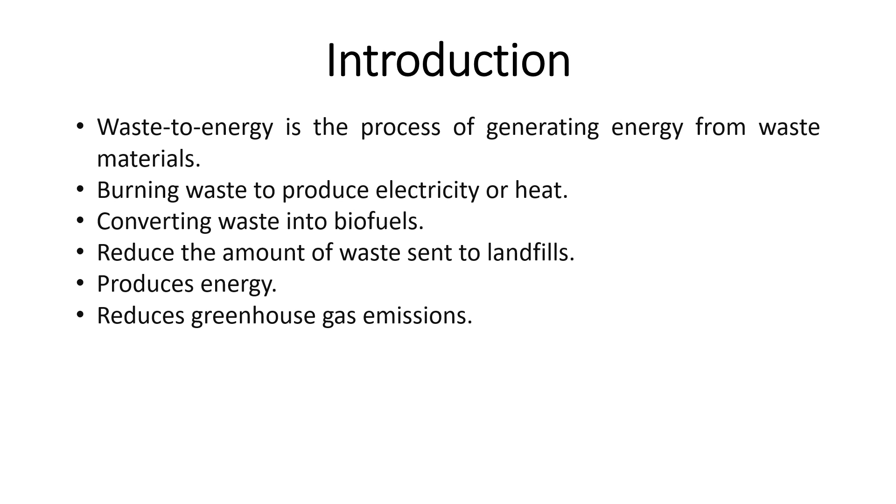So here we go for the introduction. Waste to energy is the process of generating energy from waste materials: burning waste to produce electricity or heat, converting waste into biofuels, reducing the amount of waste sent to landfills, producing energy, and reducing greenhouse gas emissions.

Need for waste to energy methods. Every year, the world generates more than 2.01 billion tons of trash. About a third of the world's waste is being openly dumped or burned. By the year 2050, the amount of rubbish generated annually is expected to increase to 3.4 billion tons. As the rubbish piles up, no number of landfills and recycling programs can keep pace with this growing problem. In order to tackle these problems, we need to have a sustainable and economical method to convert waste to energy.

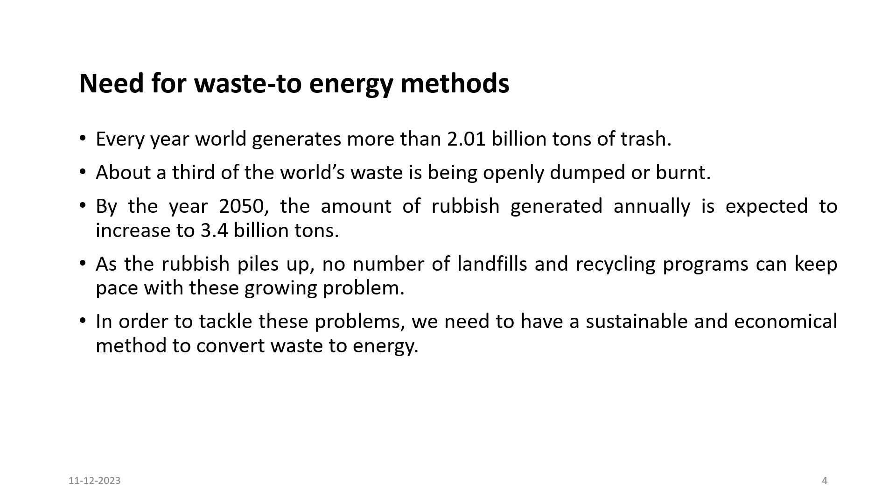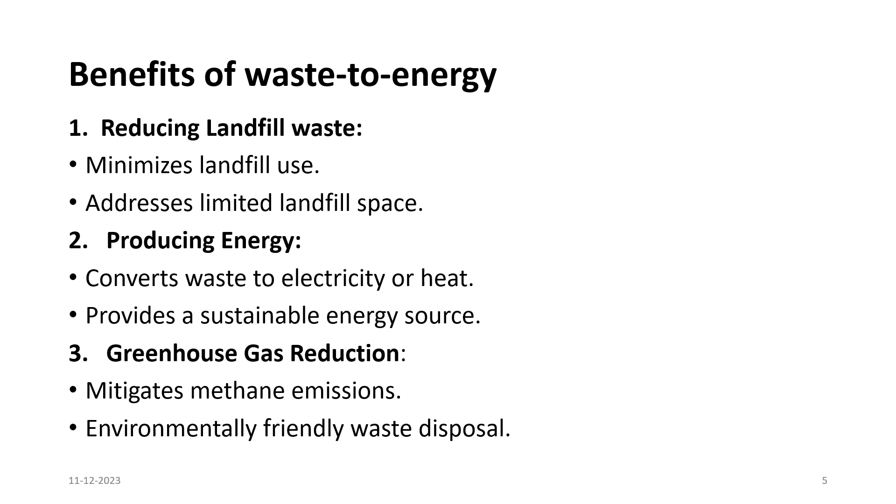The benefits of waste to energy are: first, reducing landfill waste, minimizing landfill use, addressing limited landfill space. Producing energy, converting waste to electricity or heat, providing a sustainable energy source. Greenhouse gas reduction, mitigating methane emissions, environmentally friendly waste disposal. Circular economy contribution, integrating waste into circular systems, promoting sustainable resource management. Fifth, job creation and economy, generating employment in waste and energy sectors, stimulating economic growth.

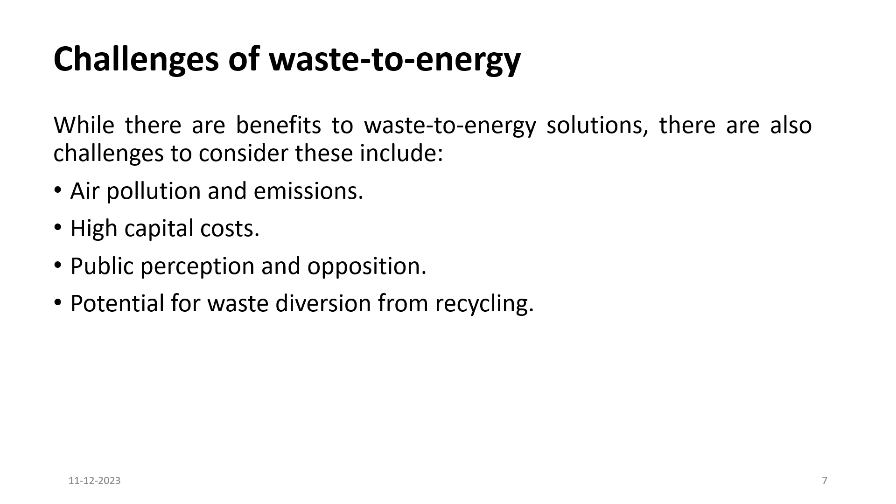Here are the challenges of waste to energy. While there are benefits to waste to energy solutions, there are also challenges to consider. These include air pollution and emissions, high capital costs, public perception and opposition, and potential for waste diversion from recycling.

Methods of waste to energy. There are several waste to energy technologies available, including incineration, gasification, pyrolysis, and anaerobic digestion. Each technology has its own advantages and disadvantages. The choice of technology will depend upon factors such as type and quantity of waste, regulations, and available resources.

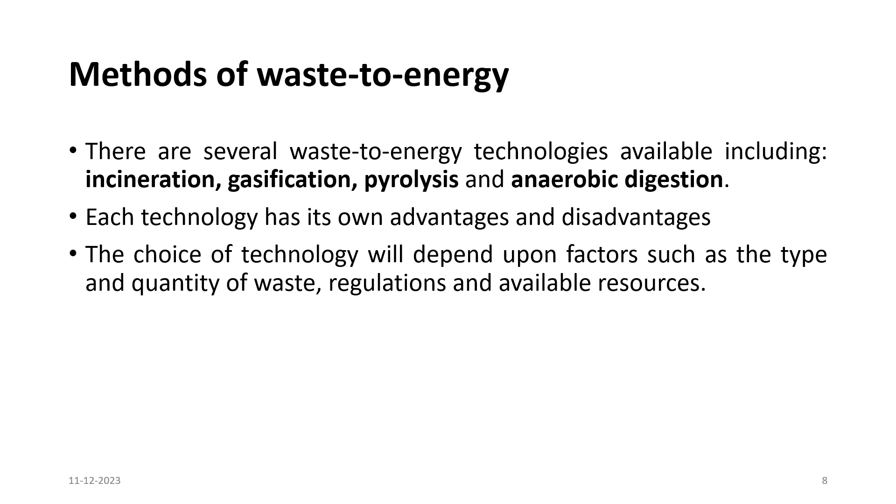Gasification is a technological process that can convert any carbonaceous raw material such as coal into fuel gas, also known as synthesis gas, or syngas for short. It is a well-known technology with a long market history, but has limited implementation due to challenges such as oxidation of hydrocarbons, high levels of CO2 production, emission of pollutants during gasification, and low calorific value of the synthetic gas produced.

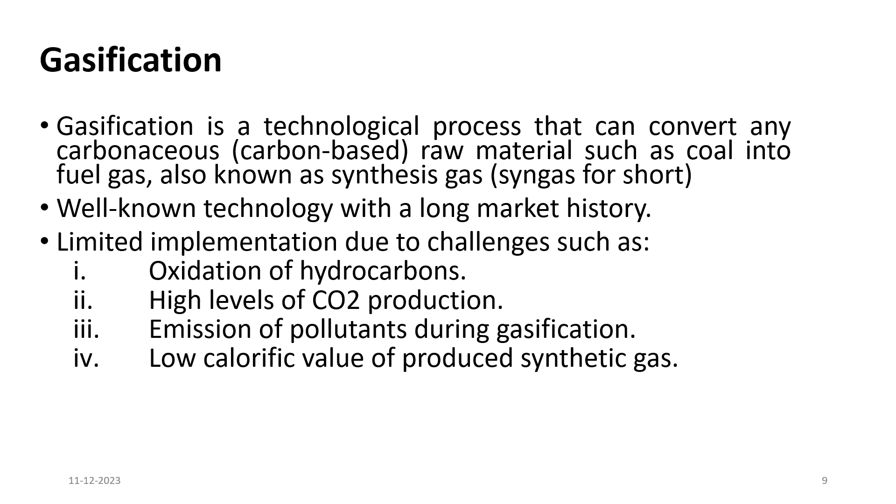Pyrolysis is a thermal decomposition process. In this process, breakdown of organic materials happens at elevated temperatures, occurring in the absence of oxygen or with a limited supply of oxygen. Three main products formed after pyrolysis are solid char or biochar, liquid bio-oil, and combustible gases, for example hydrogen and methane.

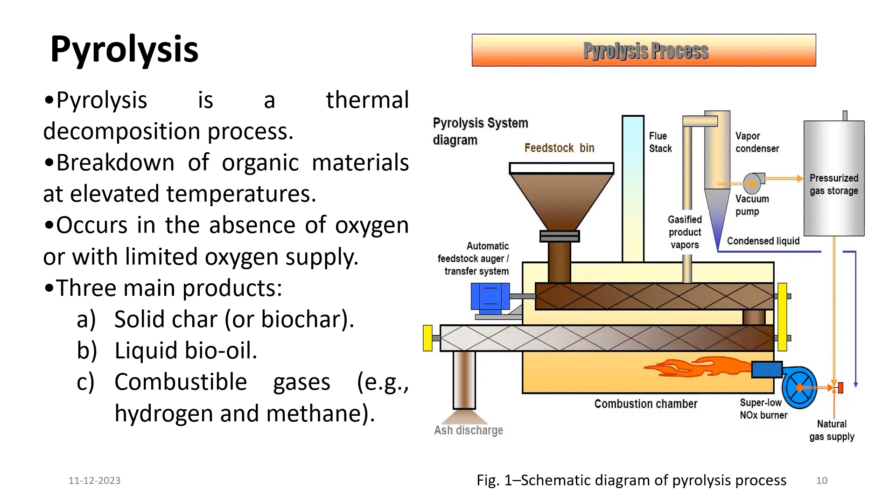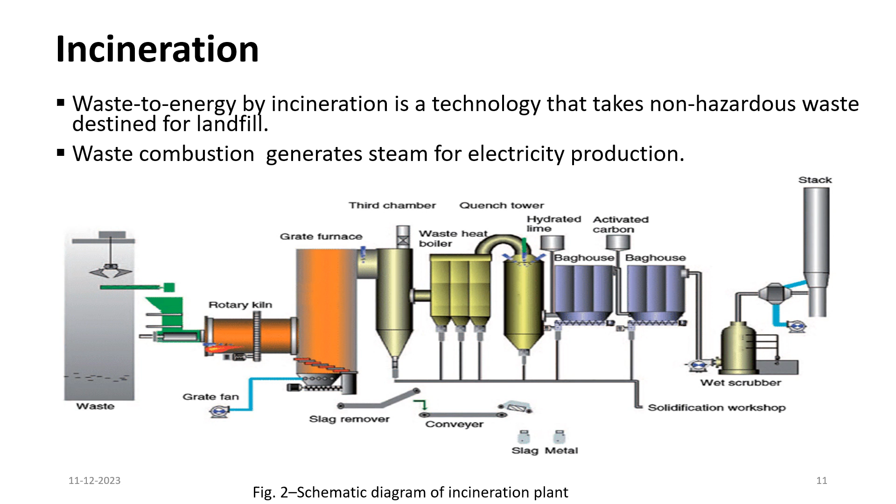Waste to energy by incineration is a technology that takes non-hazardous waste destined for landfill. Waste combustion generates steam for electricity production. This is the schematic diagram of an incineration plant.

Anaerobic decomposition is a biological process driven by microbial activity. It takes place in the absence of oxygen, distinguishing it from aerobic processes. Microorganisms break down organic materials, converting them into simpler compounds. The main byproducts include biogas and digestate.

Anaerobic digestion effectively manages and recycles organic waste, contributing to waste reduction. The process has practical applications in energy generation via biogas, and fertilizer production via digestate. It helps reduce greenhouse gas emissions, particularly methane, contributing to environmental sustainability.

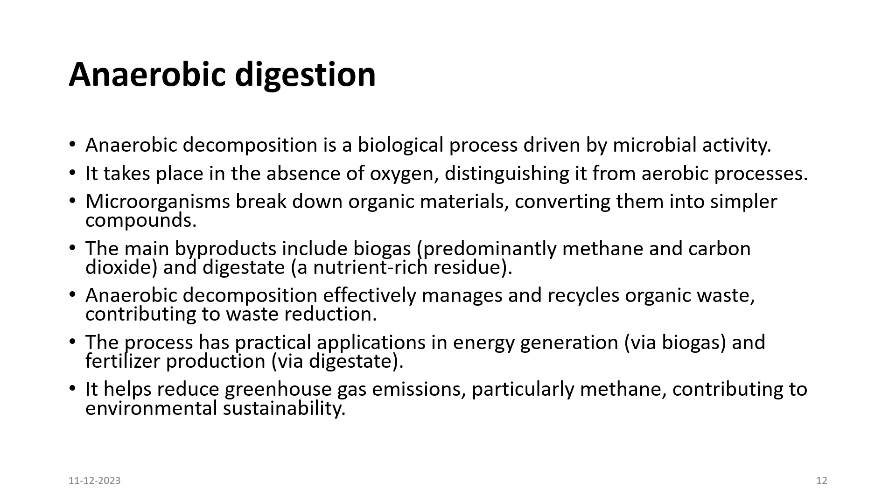Waste to energy in India. India generates over 1.5 lakh metric tons of waste daily, with potential for 200 waste to energy plants. There is a technology imperative: the need for state of the art, eco-friendly waste to energy technology meeting environmental norms. Imported technology faces challenges due to non-segregated waste in India, leading to promotion of indigenous technology supporting Make in India.

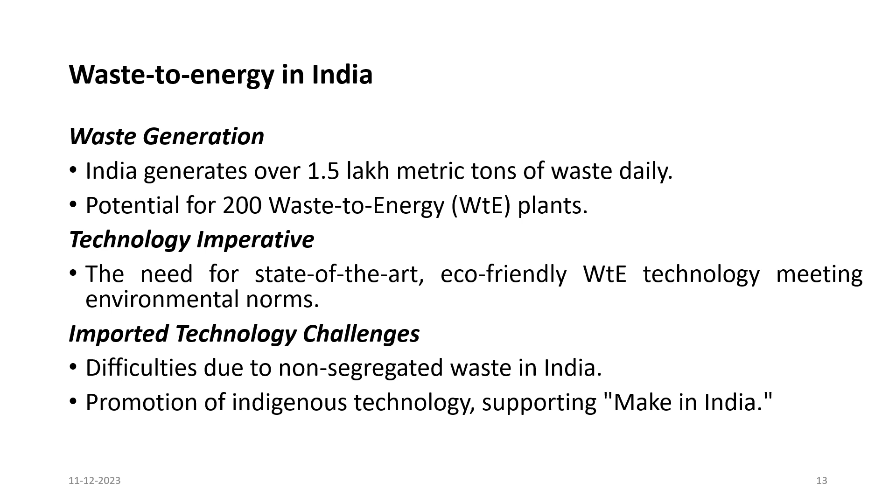Waste to energy developments in India. Renewed private sector interest, with companies like Ram Charan and NTPC investing heavily in waste to energy technology. Niti Aayog's vision for 5.7 gigawatt of waste to energy plants using various waste sources. The Ministry of New and Renewable Energy offers a 7.5% interest subsidy and incentives for urban local bodies. Past challenges in waste to energy include inconsistent feedstock supply from urban local bodies, lack of segregation disrupting waste composition, and high power generation costs compared to solar and wind energy.

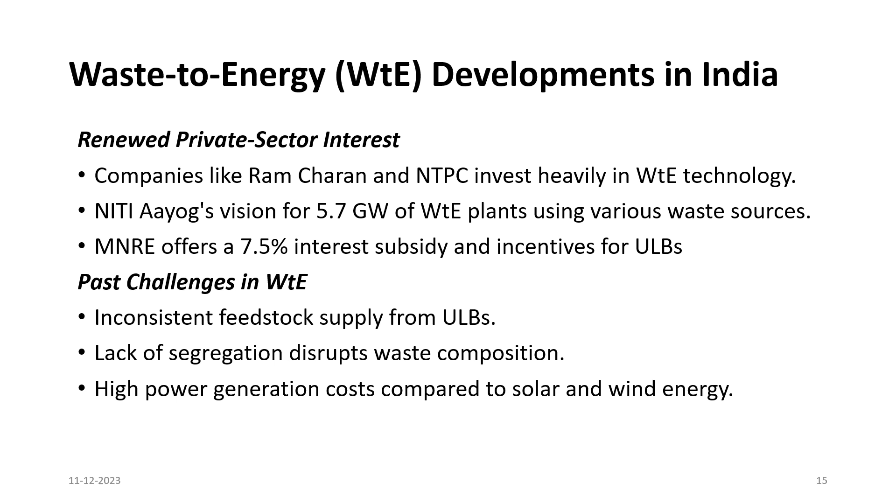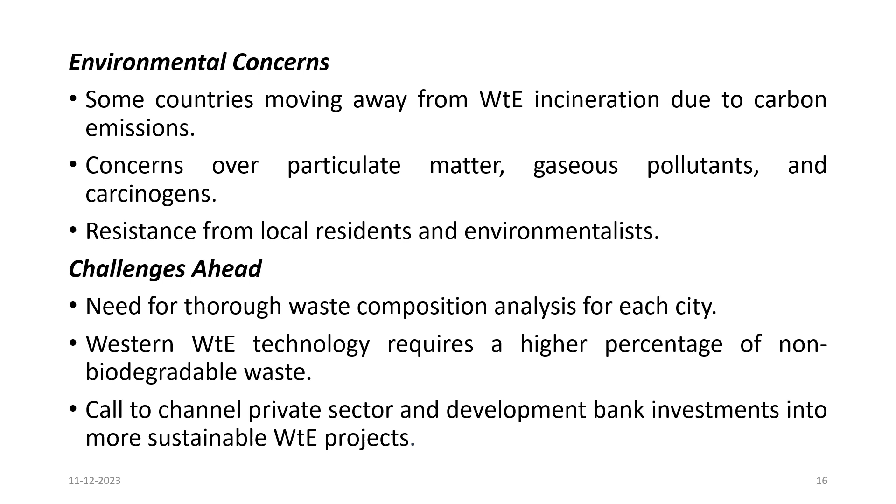Environmental concerns: some countries are moving away from waste to energy incineration due to carbon emissions, with concerns over particulate matter, gaseous pollutants, and carcinogens, and resistance from local residents and environmentalists. Challenges ahead include the need for thorough waste composition analysis for each city, as western waste to energy technology requires a higher percentage of non-biodegradable waste. There is a call to the private sector and development banks for investment into more sustainable waste to energy projects.

Now we are going to discuss case studies. There are many case studies from around the world that demonstrate the potential of this approach. Examples include the waste to energy facility in Singapore, the waste to energy plant in Oslo, Norway, and waste to energy solutions for cleaning dump sites in Delhi.

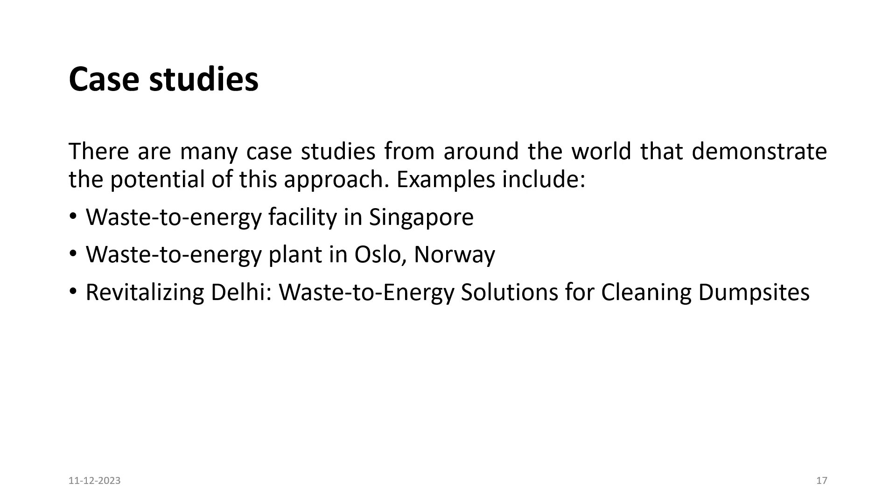Waste to energy facility in Singapore. Singapore has a population density of 8,592 people per kilometer square, and an annual waste generation of 7.39 million tons.

Incineration facilities: the largest facility for incineration is Tuas South Incineration Plant, also known as TSIP, whose incineration capacity is 3,000 tons per day. Total daily electricity produced by TSIP is 2,688 megawatt hour.

Waste to energy efficiency: Tuas is the most land efficient plant in Singapore, and also the most land efficient plant in the world. 90% volume reduction is achieved after incineration. Electricity contribution: 2 to 3% of national electricity demand is met by incineration. Metal recovery: ferrous and non-ferrous metals are recovered from ash.

Waste disposal process: ash is transported to Semakau landfill in covered barges, with final disposal via truck to the designated site. Pulau Semakau Island is also a green sanctuary and a tourist spot for many tourists. Pulau Semakau landfill space will run out by 2035.

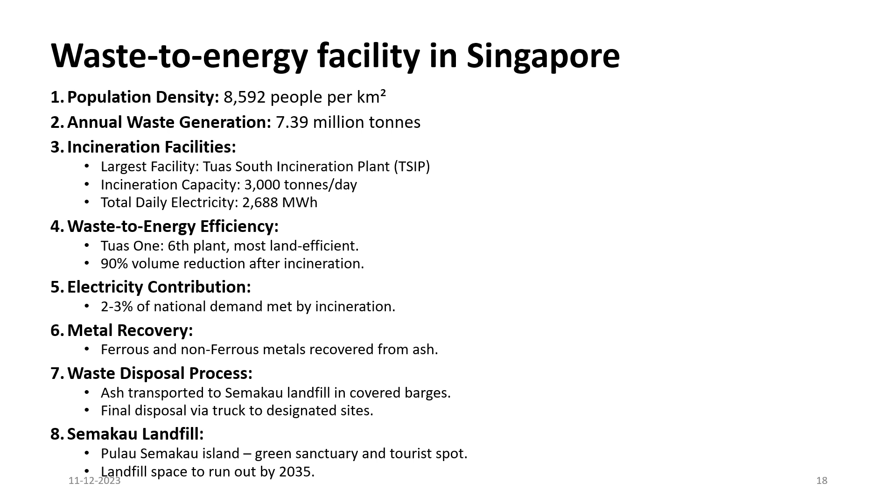The conclusion we can draw from the case study of Singapore's waste to energy plant is that efficient waste management, energy generation, and environmental consideration play a crucial role in Singapore's sustainable development. Action is required for further waste disposal challenges.

Waste to energy plant in Oslo, Norway. In Norway, waste is segregated in different bags, such as green bags for food waste, blue bags for plastic waste, and other colors for paper, glass, and other miscellaneous wastes.

Green bags are sent to biogas plants for biogas and biofertilizer. Blue bags are sent to recycling facilities for new plastic. Other waste is sent to incineration plants for generation of energy, and incineration provides heat for Oslo's district heating system.

Oslo's incineration plant has a capacity of 410,000 tons of waste annually. Oslo also imports 45,000 tons of waste from the United Kingdom. Europe dumps 150 million tons of waste in landfill yearly, and the potential for energy generation from waste can be seen in European countries.

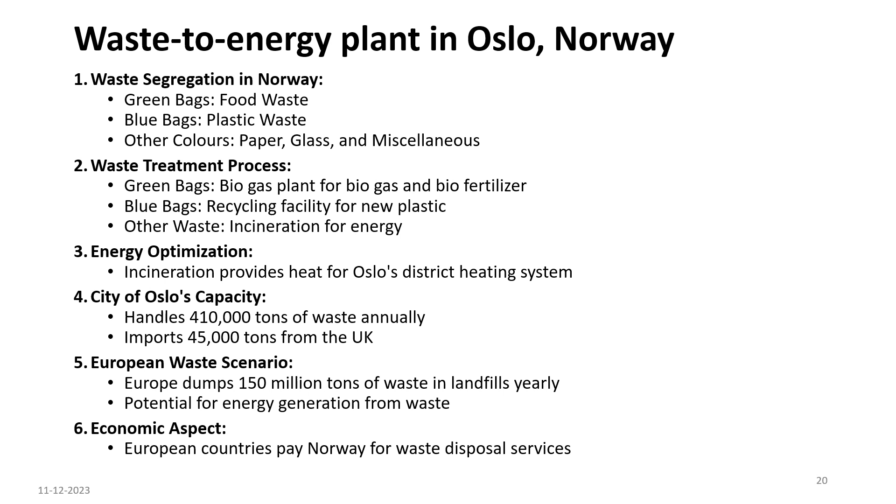European countries pay Norway for waste disposal services. Norway's waste management model emphasizes segregation, recycling, and energy recovery, contributing to a sustainable and economically viable solution. Oslo's capacity, waste imports, and European practices underscore the global potential for waste to energy initiatives.

Revitalizing Delhi: waste to energy solution for cleaning dump sites. Delhi has three major dump sites, namely Gazipur, Okhla, and Bhalswa. The area covered by these dump sites is 200 acres, holding 28 million tons of legacy waste. Legacy waste comprises inert waste, construction and demolition waste, and segregated combustible fraction.

Inert waste is being utilized in national highway projects. Construction and demolition waste is used for manufacturing bricks and tiles, and segregated combustible fraction is used by cement and thermal industries as RDF, known as refuse derived fuel.

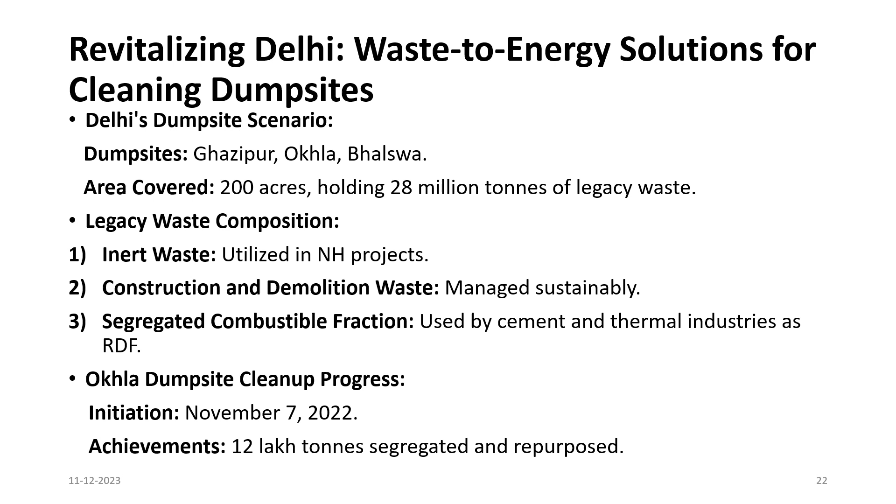Okhla dump site cleanup progress: the cleanup was initiated in November 2022. Achievements: 12 lakh tons segregated and repurposed.

Ghazipur's impact on infrastructure: Delhi Ring Road UER-II utilized 30 lakh metric tons of inert waste, reducing the height of the Ghazipur dump site by 7 meters.

Waste utilization in highway construction: inert waste contributes 50% to highway construction. Collaboration for efficient waste utilization is very important.

Cleaning timeline projection: Okhla and Bhalswa by December 2023, Ghazipur by March 2024. Challenge: limited machinery hinders faster waste segregation. Only 30% of waste has been cleared as of December 2023.

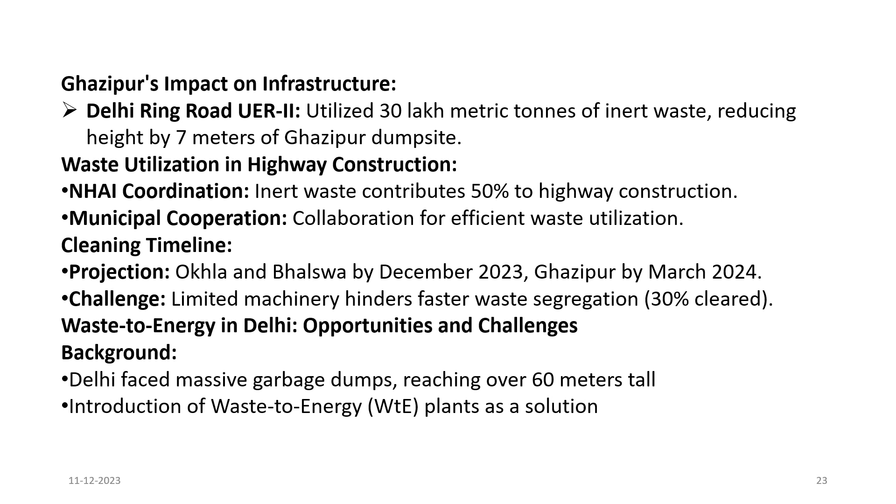Background: Delhi faced a massive garbage dump reaching over 60 meters tall, leading to the introduction of waste to energy plants as a solution.

Ghazipur Waste to Energy Plant, established in 2011, processes 2,000 tons of waste per day, generates 12 megawatts of power and 127 tons of fuel, contributing to India's goal of 40% non-fossil fuel based energy by 2030.

Air pollution control measures include adherence to the European Industrial Emissions Directive and stringent pollution control devices. A Central Pollution Control Board report submitted to the National Green Tribunal and Supreme Court reveals toxic emissions from waste to energy plants in Okhla, Bawana, and Ghazipur areas.

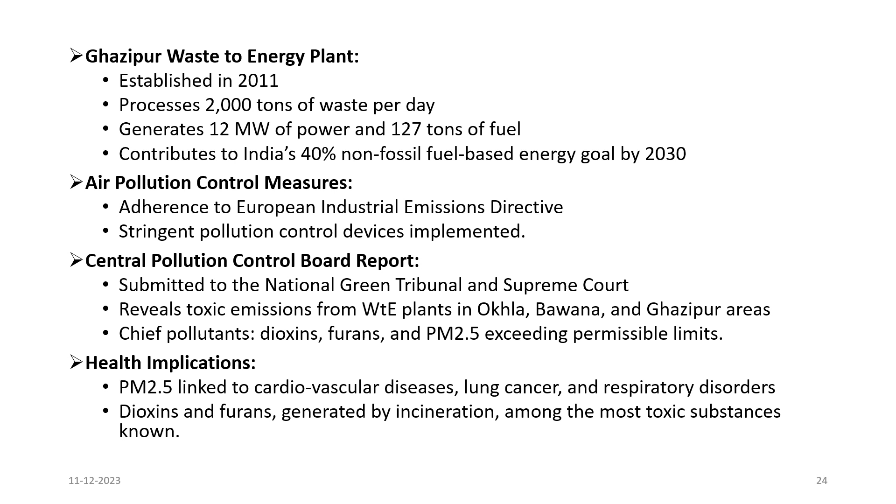Chief pollutants are dioxins, furans, and PM2.5, exceeding permissible limits. Health implications: PM2.5 is linked to cardiovascular diseases, lung cancer, and respiratory disorders. Dioxins and furans generated by incineration are among the most toxic substances known.

Conclusion: the Ghazipur waste to energy plant, while contributing to energy goals, faces challenges highlighted by the Central Pollution Control Board report. Balancing energy generation with environmental and health concerns is crucial for waste to energy initiatives in Delhi.

Future of waste to energy: a path to sustainability. Unlocking sustainable potential, waste to energy solutions offer a promising path toward a more sustainable future. Advancements in technology and cost reduction make these solutions increasingly viable and scalable. Key factors for the future include ongoing technological advancements that enhance efficiency and reduce environmental impact.

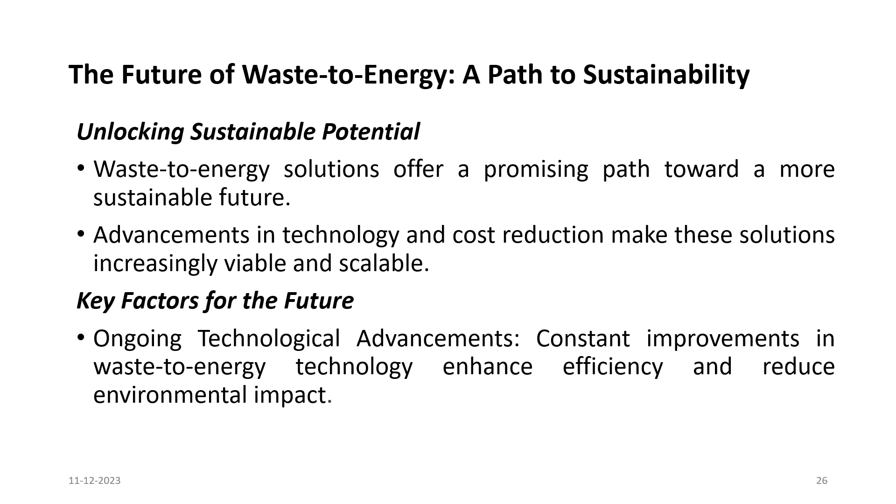Sustainable Development Goals: waste to energy aligns with key sustainable development goals, including Goal 7 (affordable and clean energy), Goal 11 (sustainable cities and communities), Goal 12 (responsible consumption and production), and Goal 13 (climate action). Environmental benefits follow.

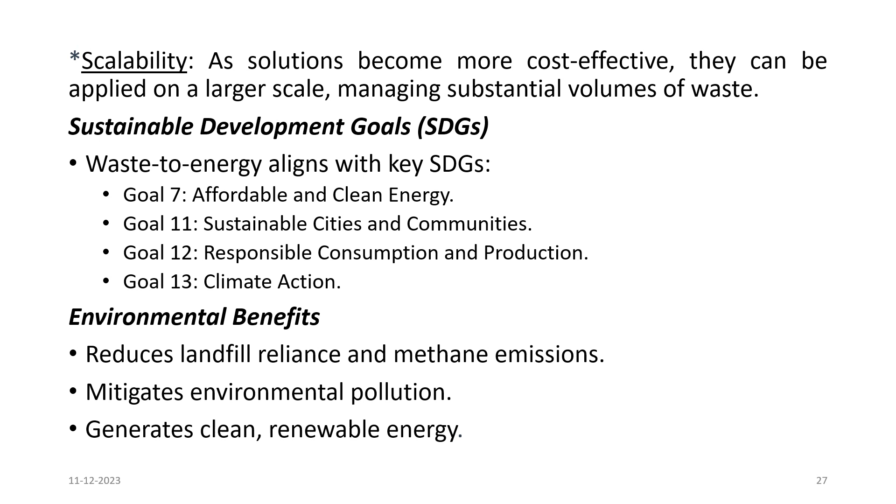It reduces landfill reliance and methane emissions, mitigates environmental pollution, and generates clean, renewable energy. Economic and social impacts include economic growth, as waste to energy projects create jobs, stimulate local economies, and enhance energy security.

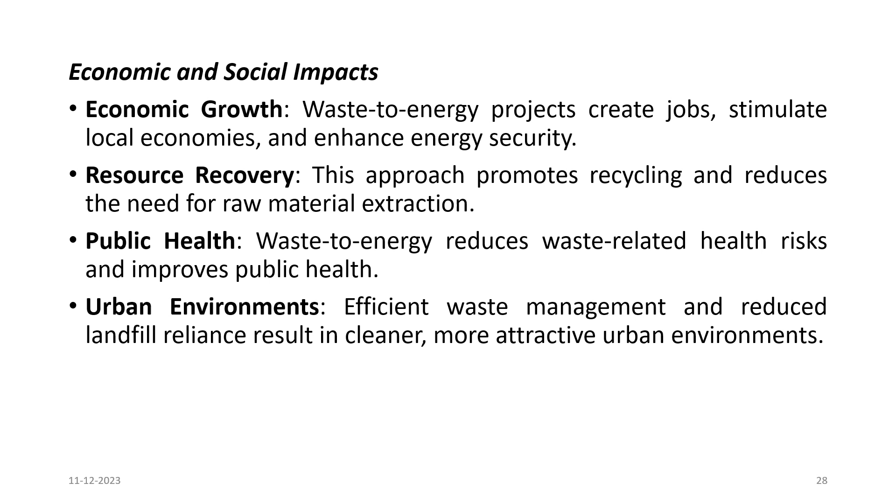Resource recovery: this approach promotes recycling and reduces the need for raw material extraction. Public health: waste to energy reduces waste related health risks. Urban environment: efficient waste management and reduced landfill reliance result in cleaner, more attractive urban environments.

Conclusion: waste to energy is a promising path forward towards a sustainable future. It aligns with sustainable development goals and contributes to the global sustainability agenda. Continuous advancements and ongoing technological improvements make waste to energy more viable and environmentally friendly.

It brings economic growth, resource recovery, improved public health, and cleaner urban environments. Environmental responsibility: waste to energy reduces pollution and methane emissions, and generates clean, renewable energy. A cleaner future: waste to energy has the potential to transform waste management and energy generation for a more sustainable world.